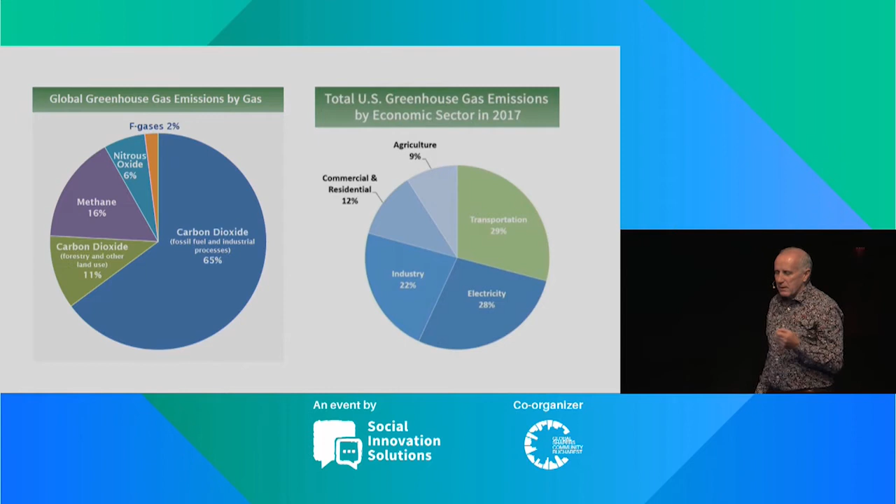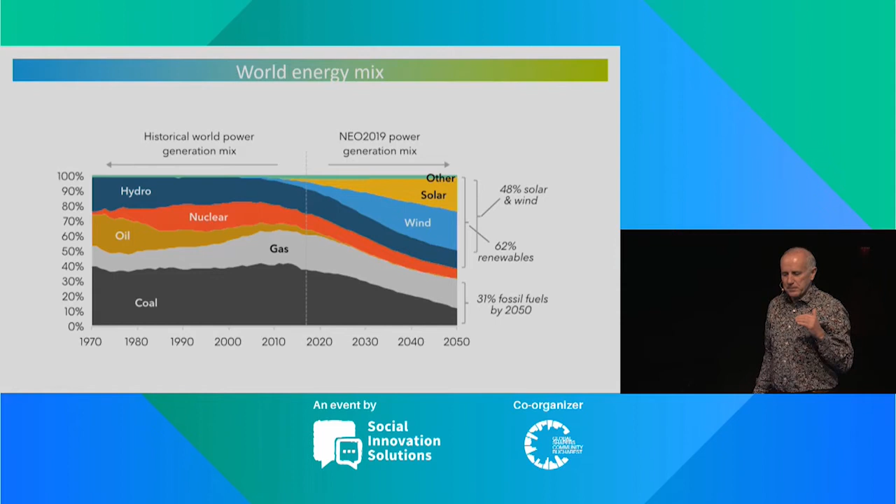Over in the UK, a windy place, not so sunny, the amount of coal we now burn in power stations is almost none. We've got 4 power stations still burning coal, and they are due to be phased out by 2024. Instead, we're building onshore and offshore enormous amounts of wind energy, as well as solar, which in southern Europe, these proportions are the other way around.

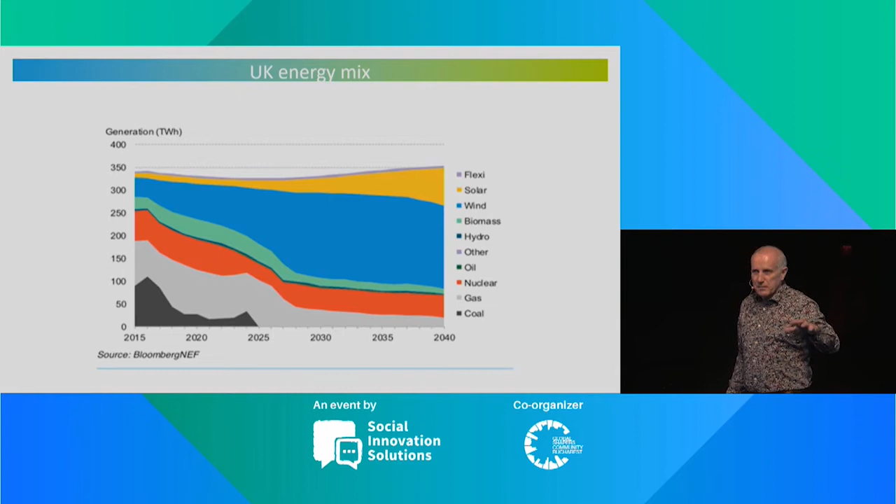So you can see that the Western economies are doing what they can to offset the growth in carbon emissions from power generation. In China and India and the rest of the world, it's a different problem, but they too are observing these trends.

So, wind is our hero, sun is our hero. At one point last summer in the UK, sun and wind combined outperformed the burning of gas, oil, and a little bit of coal for the first time ever.

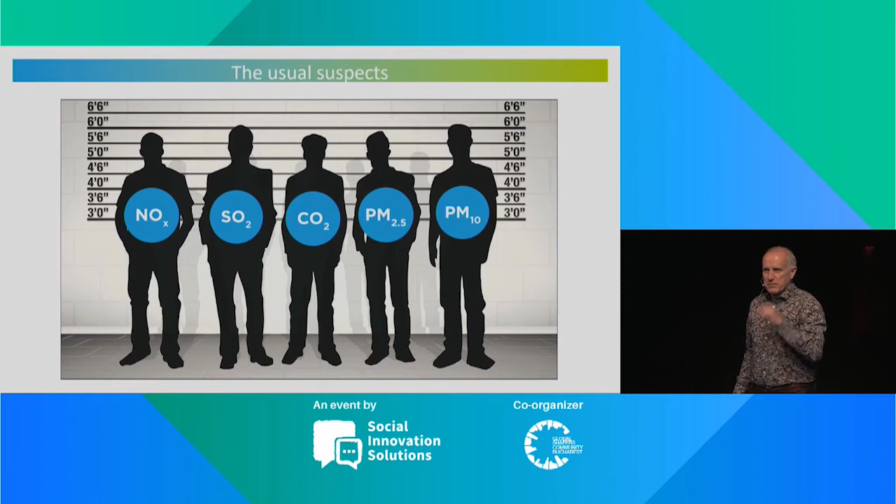In due course, we're going to see 62% of our generation coming from these renewable sources, because these are the villains. In the middle, we have CO2, but alongside him stand nitrogen oxides, sulfur dioxide, and on the right, PM, that stands for particulate matter, soot, in other words, very small particles of unburnt fuel that come from the exhaust pipe of our traffic.

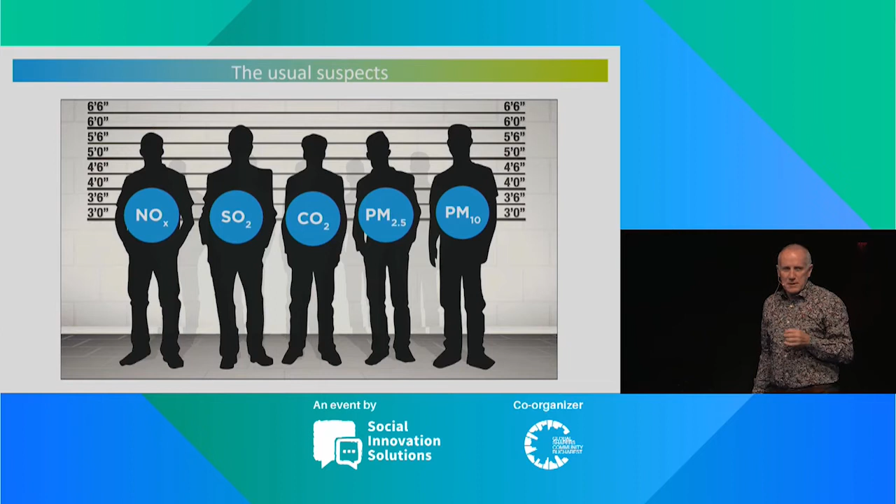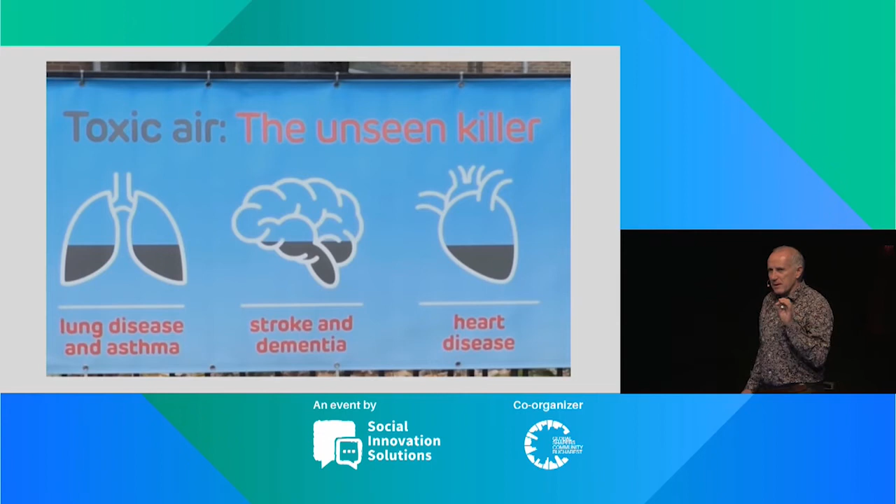CO2 and global warming apart, it's air quality that is the more immediate threat to our lives in our cities, especially to our young people on the way to school, in the playground. Air quality in Europe's cities is bad and getting worse, and these are the consequences of it. So it's the vehicle that is at the heart of the problem.

Italy comes off worst of all, but the UK is no hero in this respect. These bars show the number of deaths attributable to nitrogen dioxide air pollution.

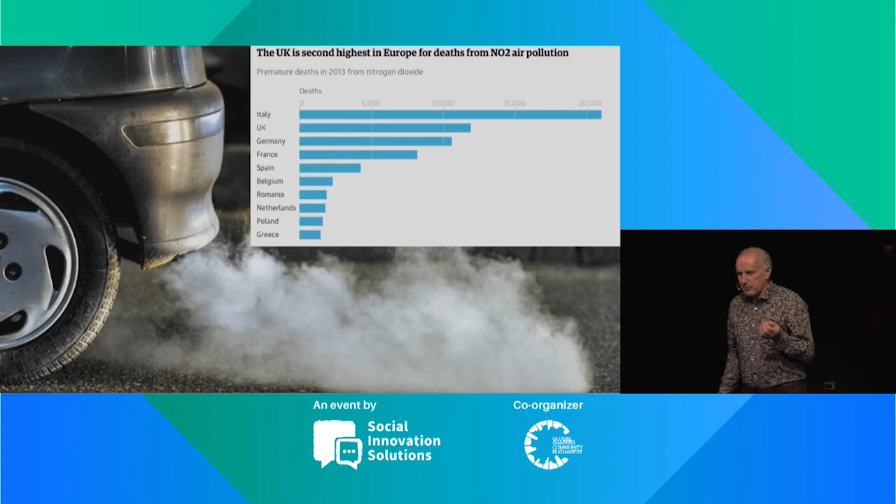Now, I'll talk to you about Tesla a moment, and I'll talk to you about batteries. This is a liter of diesel fuel, and this is a battery. Now, a liter of diesel contains 10,000 watt-hours of energy.

A kilogram, or a liter, is roughly a kilogram of diesel. A kilogram of batteries, that's to say 40 of those, contains only 250 watt-hours per kilogram of energy. In other words, 1/40 of the energy of diesel. You cannot beat diesel or petrol for energy per weight, which is why batteries are so heavy and costly.

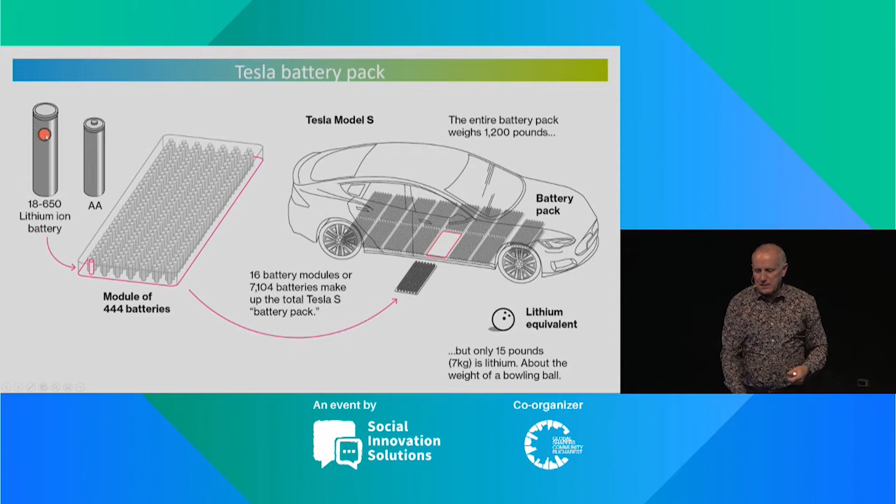It contains 7,104 of these. These are called 18650 cells. That's to say, this little chap here, slightly bigger than the AA battery that you would power a consumer product with, but these are the workhorse of the battery world.

In addition, there are things called pouch cells. And this is an example of a pouch cell as found in something like a Renault Zoe or a Nissan Leaf. But they all need to be encapsulated in fireproof envelopes, as you see here.

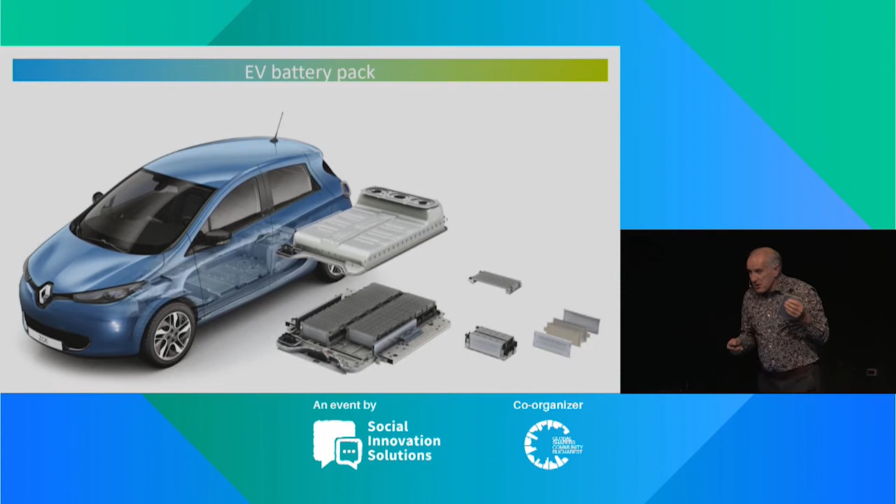There's only a small portion of that huge weight that is actually battery. The rest of it is support systems, impact resistance, fire protection. It's a complicated business. And not only that, but there are 8 or 9 different types of chemistry of lithium that you can choose to power your vehicle by.

And you can see from this chart here that some are expensive, some are unsafe, some don't last very long, and lithium has vulnerabilities wherever you look, for fire, for safety, for life, and for cost. And our job is to try to reduce all those risks and make lithium behave, to tame it, if you like.

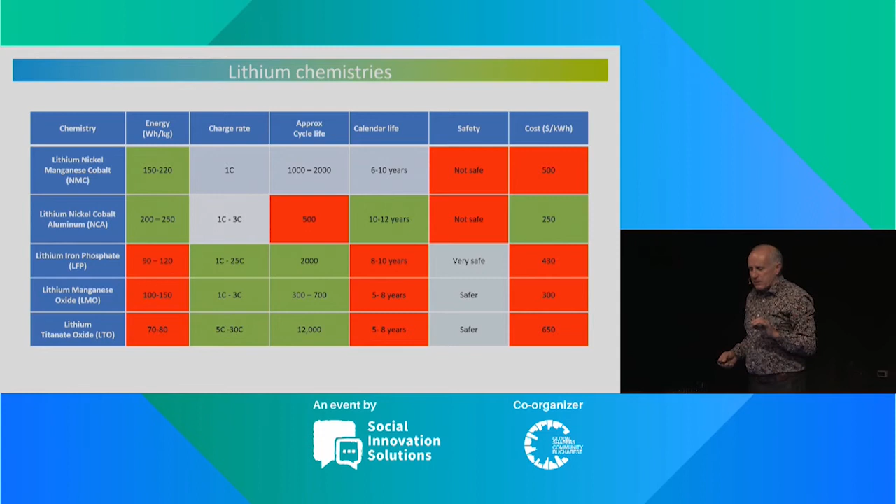The other thing about lithium batteries is they used to be extremely expensive. And the good news here is the price of lithium batteries is falling like a stone. At the moment, it stands at about $200 per kilowatt hour, and it's heading down below 100. And at that point, the competitiveness between a battery-powered car and a diesel or petrol-powered car is eliminated.

At the moment, they're 30, 40% more expensive. But it's just a matter of time before the volumes of battery, the volumes of cars, come down to the same price of an internal combustion car. And so the battery industry is looking to reduce its costs, increase its energy, increase its safety, double its life, operate at all kinds of temperatures, cold or hot, and be, above all, recyclable. These are huge challenges, and they're not going to be achieved in a hurry.

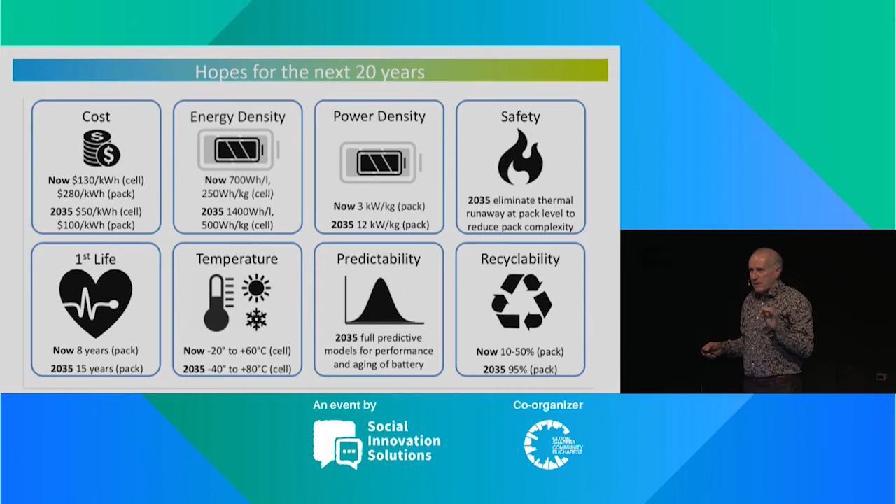So out of 38 million vehicles on Britain's roads today, there's only 100,000 of them are all electric. Even I'm a fan of electric vehicles. I drive a hybrid because I cannot rely upon a battery to do all my journey's work for me. But the trends are here, the trends are clear, and by 2040, this is Bloomberg's forecast, they expect to see electric vehicle sales overtaking those of the ICE, the internal combustion engine.

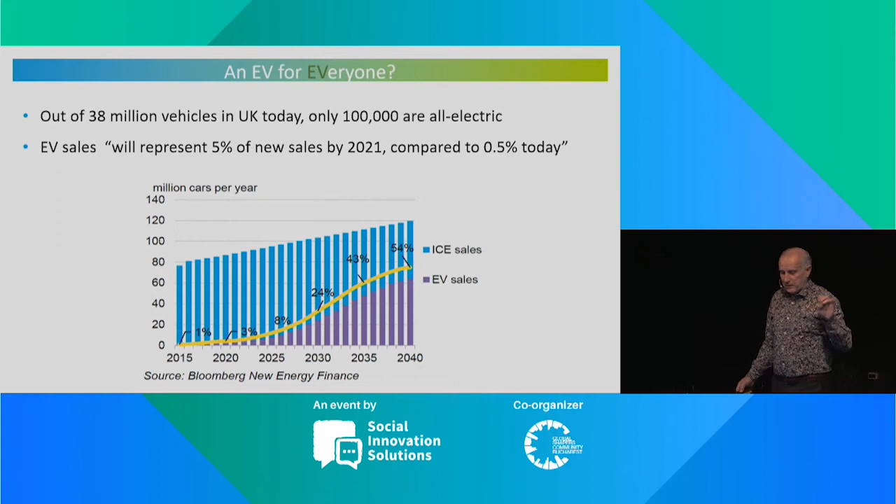But with all these vehicles on the road, with all those batteries powering them, they all need to be recharged. How and where are we going to charge them all? It's not possible to imagine having a petrol station in the front of every house, and yet the EV people believe that we're going to be able to have a charging post on every house.

Now, I have one of these on my house, but it only does a small job because it's quite low powered. Let me explain to you this following chart.

The charging post on my house delivers at the rate of 7 kilowatts, and I've got a 14 kilowatt hour battery. Therefore, it takes 2 hours to charge my battery from this low-powered unit, 7 kilowatts at the house. If I have a very big battery like a Tesla, it's going to take 9 hours to charge it at home, which is not only just overnight, but more than overnight.

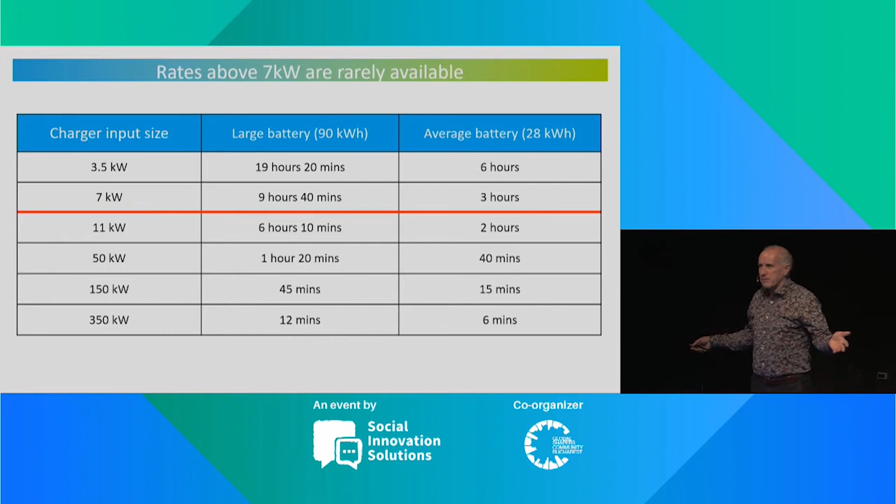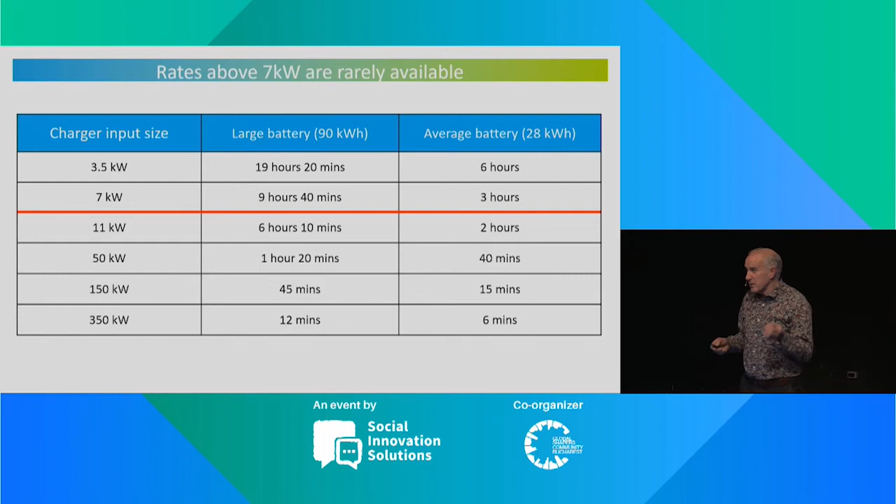And so you've got to have high-powered charging out there in the public. And until you've got to 50 or 150 kilowatts, you're not going to get even down to a fraction of the time it takes, of the expectancy that people have to charge their cars. We've got to be able to find a way of charging vehicles quickly. Until we do that, they will not be widely used.

And so this is what our National Grid white paper says. I'd like you to take the moment to digest these important points. Home is not going to be the place to charge a vehicle. Half of the homes in our country don't have even a place to put the vehicle, never mind charge it, because they're in apartment blocks or in narrow streets where you can't get parking connected to the grid.

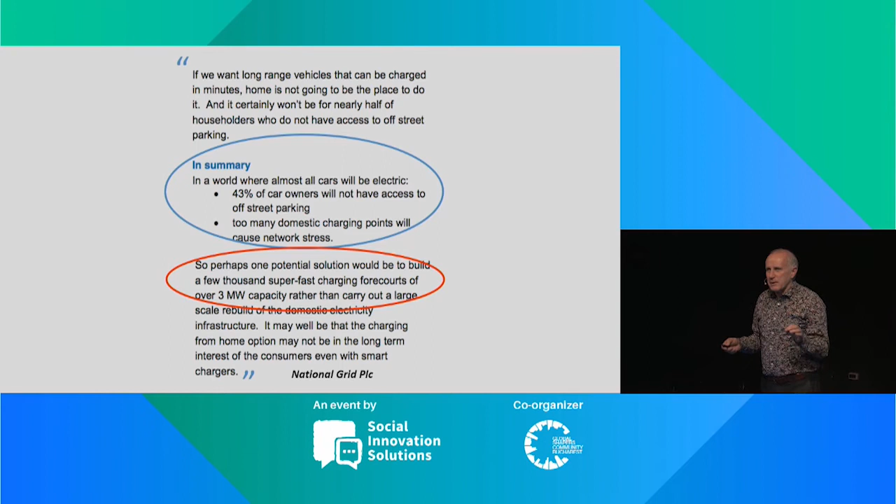So, if we want a world in which all cars are going to be electric, one solution will be to build a few thousand super-fast charging forecourts. That's to say, like today's filling stations. Forget the street, forget the home, let's build a few very large fast-charging forecourts.

Now, if you do that, and the charging time of those forecourts remains the same, it isn't going to solve the problem, because what you need is a new kind of battery. And that's what the Zap&Go project is all about.

We have developed at Oxford a new type of battery which is a supporting partner to lithium. It's called carbon ion, and it comprises novel nanomaterials able to accept the charge extremely fast, and is very robust, and will charge and recharge safely many thousands of times. It contains no lithium and has none of the drawbacks of those lithium batteries that I mentioned earlier.

It does, however, have weaknesses. It's not able to do as much work as a battery. It doesn't last as long with the charge. But it has all the counters to the weaknesses of lithium.

And therefore, this points to the clear solution of a hybridization, a matching of carbon ion and lithium ion in the same place. This way, the charge is taken fast, and we protect the delicate lithium from damage from fast charging. And therefore, the filling station of the future will combine lithium batteries and carbon ion batteries in a giant subterranean hybrid storage. Let me picture this for you with this video.

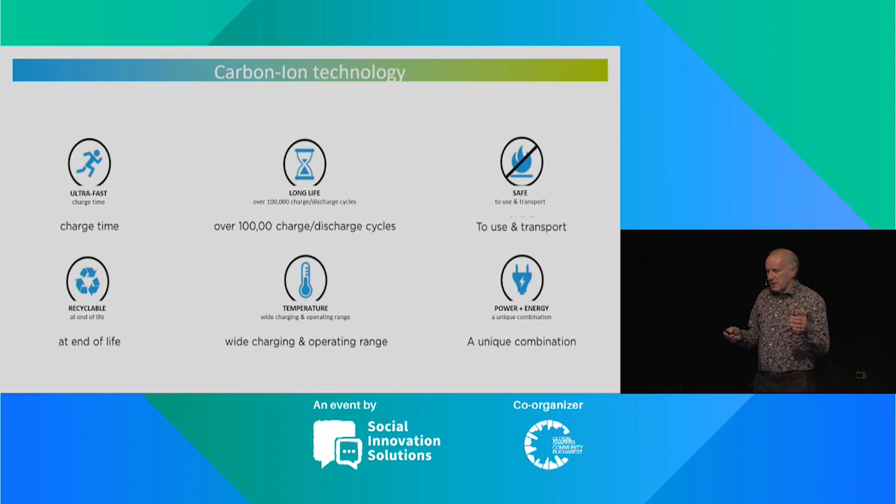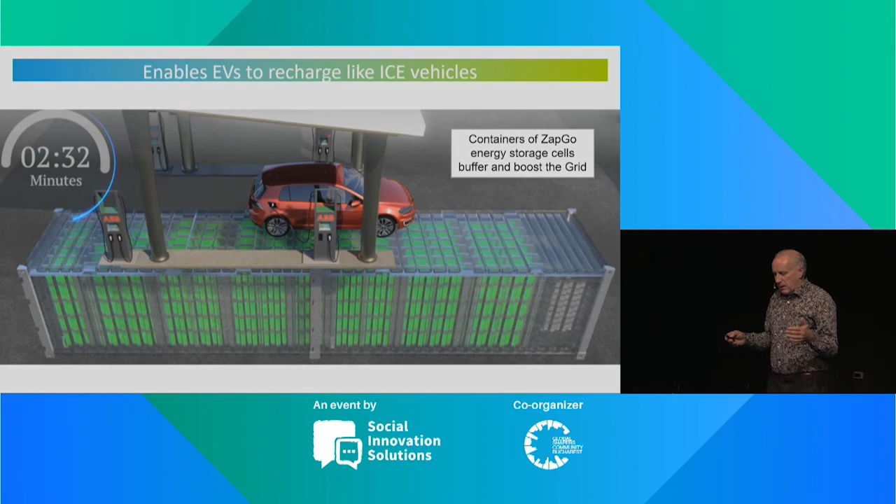In any given filling station, there are giant subterranean tanks full of diesel. In the future, there will be giant subterranean containers full of carbon ion cells. Today, the filling station plays a central part in modern life, a place to fuel our cars, shop, and buy services. The evolution of electric vehicles will see a revolution in these filling stations.

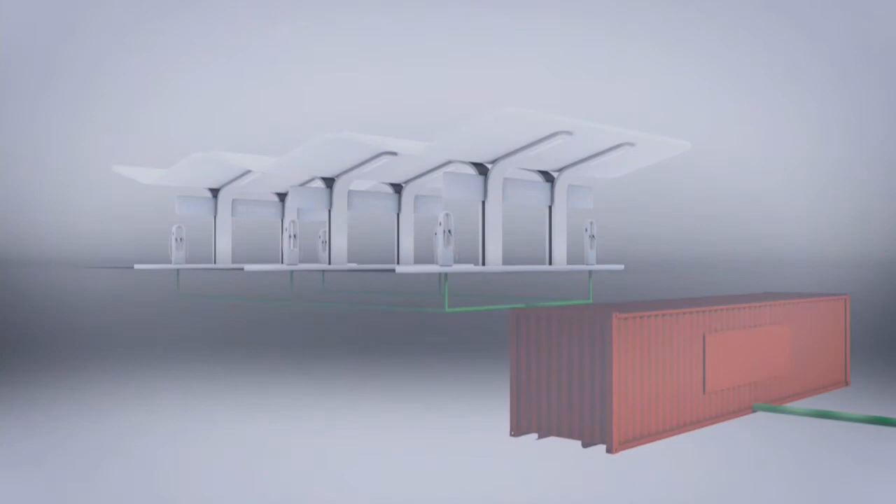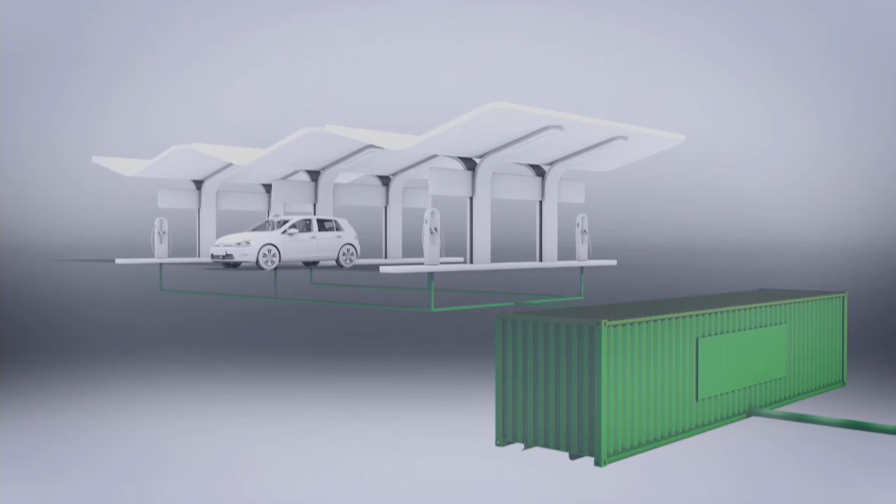Zap&Go will be at the heart of that revolution. Much like existing fuel distribution, fueling stations will add large underground batteries to store the charge locally. These large energy stores will be filled up at night at off-peak rates using green electricity. Drivers will charge up from the energy stored in the underground batteries, not directly from the national grid. As more and more drivers switch to EVs, these underground batteries will need to be refilled more quickly.

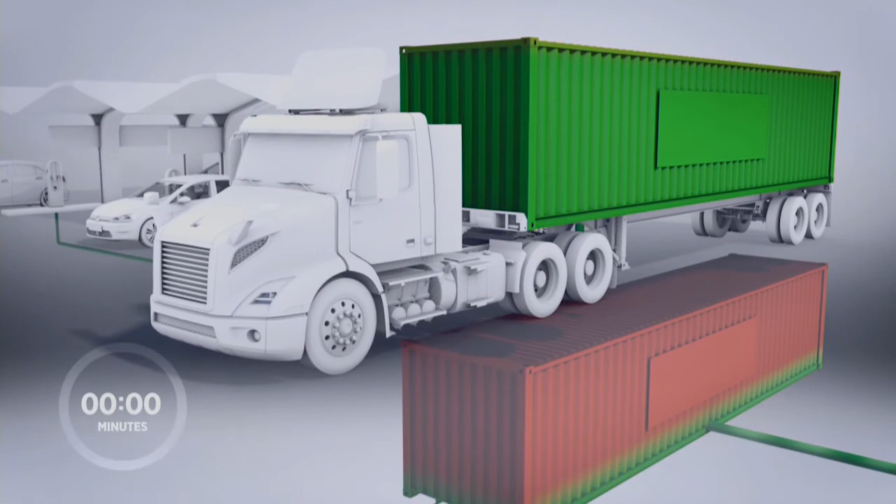To meet this peak demand, just like a fuel tanker today, stored electricity can be delivered via truck-mounted Zap&Go carbon ion storage. Carbon ion technology allows rapid charge of underground batteries in the station in a few minutes. Zap&Go carbon ion storage is non-flammable and safe. With a charge held locally and Zap&Go fast charge technology in place, the e-charging station can operate with the same speed and convenience that people are used to with conventional fuel.

Zap&Go technology allows for a complete charge of an EV battery in just 5 minutes. The safe storage system allows for the rapid turnover of vehicles. The unique fast charge technology will allow fuel and power delivery to meet the growing demands of EV charging without costly and prohibitive changes in infrastructure. By using the existing refueling network, driving and charging an EV is as quick and convenient as drivers expect with their conventional vehicles.